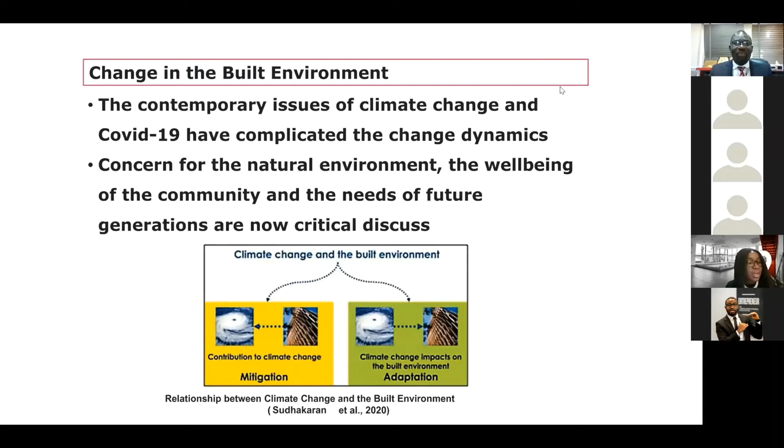And in the built environment, the contemporary issues of climate change and COVID-19 have actually complicated the change dynamics as we have it. And climate change and COVID-19 cannot be treated in isolation. That's why I've developed in this study a STEEP analysis, STEEP being an acronym: S for social, T for technology, E for environment, E for economy, and P for politics and legal. But our focus here is on the environment, using this to analyze the Nigerian built environment.

Because as we prepare for the future, nobody can know for certain what the future will be, but we can at least envisage it in order to be prepared for it, because the future belongs to those who prepare for it today. So the focus of this lecture is on the environment and how architectural education can respond to the change dynamics of the environment, although environmental issues essentially cannot be treated in isolation. So in preparing for change, there is a need for us to peer into the future.

Some studies have shown that the inevitable rural-urban migration is due to climate change. But most studies have confirmed that rural-urban migration is chiefly for economic reasons rather than climate change. And this is important and instructive. That's why people from depressed economies and unstable, repressive governments will rather seek a better standard of living and job opportunities in urban centers and thriving countries.

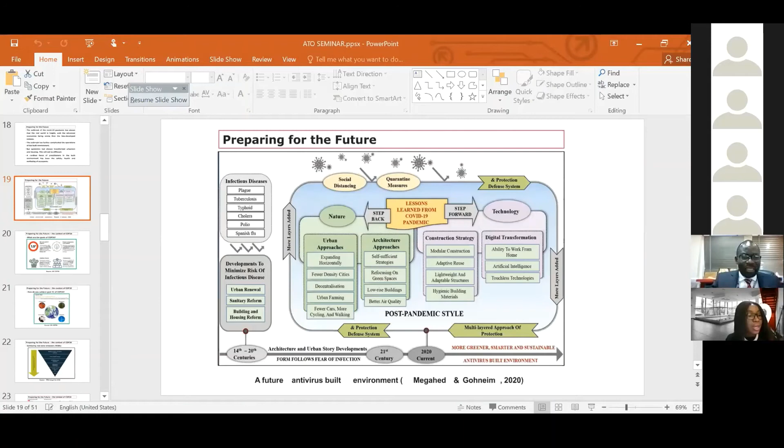So, okay, I will reshare it, but I will just quickly explain for the sake of time that we step back into nature, and we step forward into technology. As we step back into nature, we look at urban approaches in addressing this problem in terms of expanding horizontally, fewer density cities, decentralization, urban farming, fewer cars, more cycling and walking,

and architectural approaches in self-sufficient strategies, refocusing on green spaces, low-rise buildings, better air quality, and step forward into technology, as Azan had rightly presented it, in modular construction, lean construction, adaptive reuse, lightweight and adaptable structures, hygienic building materials, ability to work from home, that's digital transformation, artificial intelligence, and touchless technologies, where robots and humans can easily interact. That is stepping into the future, that's technology.

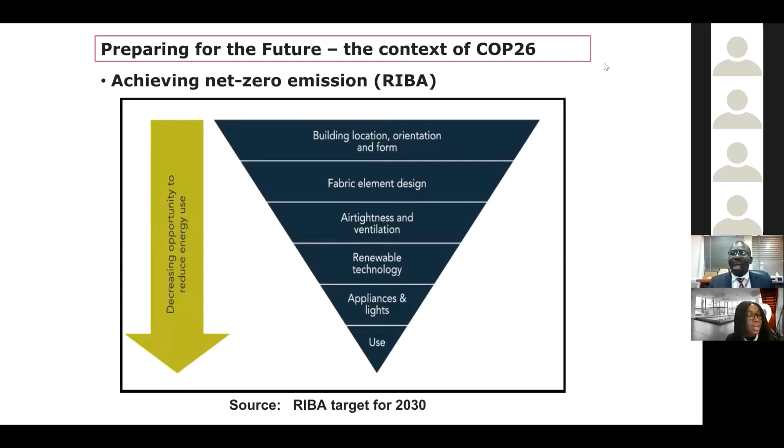And in achieving these net zero emissions, training also has to be in terms of the design of buildings, location, orientation, and form, which occupies the large band in this graph, and the lowest one has to do with use. So you can see from this chart that rather than relying more on appliances and gadgets, it all begins by getting the design right in terms of location, orientation, form, and fabric elements. It is through this we can essentially reduce energy use in buildings, just the same as in achieving the 17 sustainable goals, out of which 10 relate directly to the focus of our discussion today.

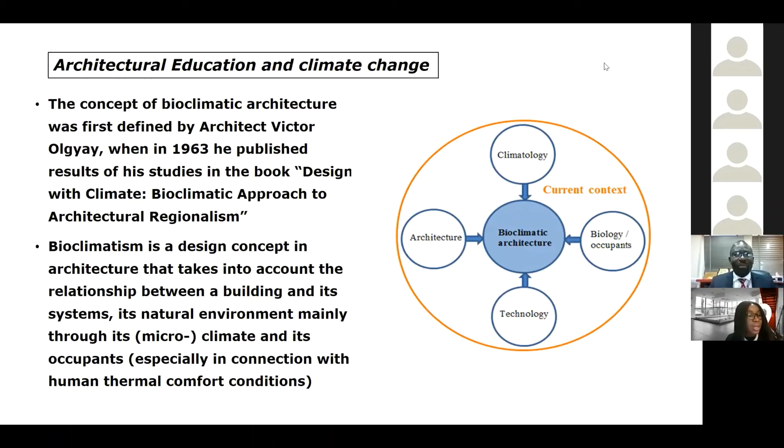So the future of architectural education is quite interesting. We know it's not static. Environment is not static. Nature is dynamic. Therefore, architectural education is expected also to be dynamic. If we take a lesson from the bioclimatic design of Victor Olgyay in designing buildings with climate, we find that even in this current nature, or beyond bioclimatism, the origin of the bioclimatic approach itself can be traced to vernacular and traditional buildings. That's why I am advocating for the combination of nature and technology in solving this problem, in training, and in looking into the future.

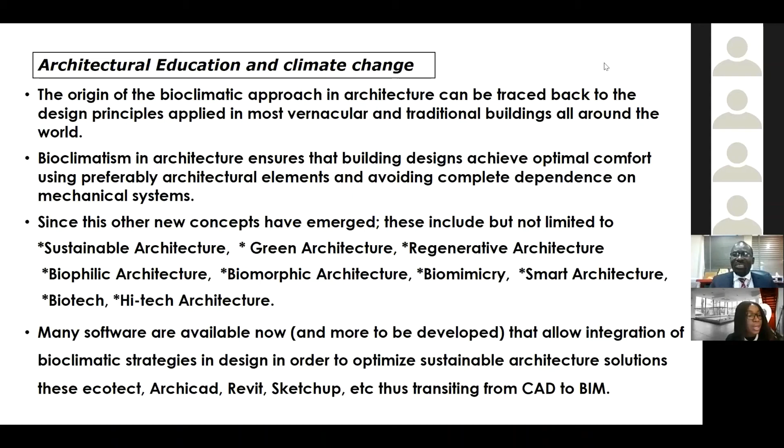And the same thing we have today as sustainable architecture, green architecture, regenerative architecture, biophilic architecture, biomorphic architecture, biomimicry, smart architecture, biotech, and high-tech architecture can all be put into one box as relating nature with technology. And again, we have different software that has been developed, Ecotect, ArchiCAD, Revit, SketchUp, all transiting from CAD to BIM, and that's what we have.

So, ladies and gentlemen, in conclusion, I would like to conclude quickly by attempting to answer 5 pertinent questions and also quickly present to you a project which we have just concluded that peeps into the future. The first question is how students are prepared for the unpredictable future and the challenge of climate change. And I will simply answer by saying, yes, our students are being prepared, by virtue of what is currently in the modules, in the courses and in the teaching, emphasis being placed on occupant safety, health and comfort, on architectural science, on sustainability.

The second question is, what are the extant modules in preparing these students for climate change? In all those 8 modules that I've enumerated, it means that from time to time we look at the contents of the courses and improve on them, also applying further innovation and findings from research and technology in improving the course delivery, the curriculum, and the way and manner these courses are being taught.

The third question has to do with the degrees, whether there will be any change or not. I believe very sincerely that the 2-tier degree structure for training architects will still be the best option. However, as I've said, curriculum is being changed from time to time, and there are higher and professional degrees in MArch, in PhD architecture, which I would rather prefer, that architects only will have PhD in architecture, but others will have PhD landscape architecture, PhD in architectural studies, as we have in reputable institutions abroad.

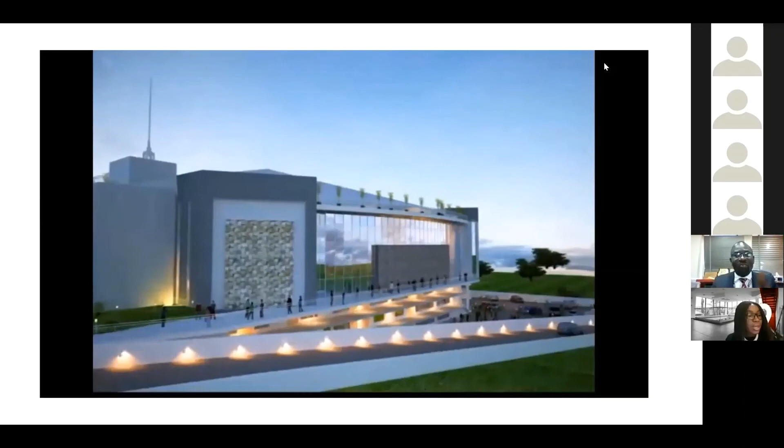Give me some few minutes in answering this question, because that will help us with the design portfolio and the project that we have just concluded that I'll quickly show us now, which is the Citadel project. And we'll see that this is an animation. This was done about 5-6 years ago in terms of the design, about 6 years ago, but it's currently standing now. And we'll see the animation compared to the live building as the building is standing.

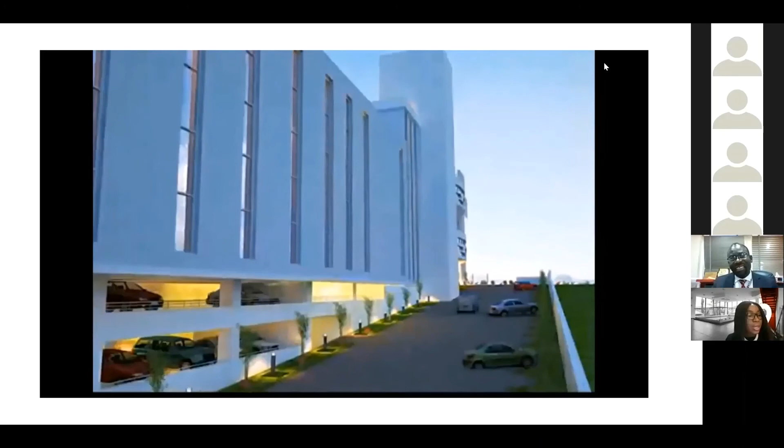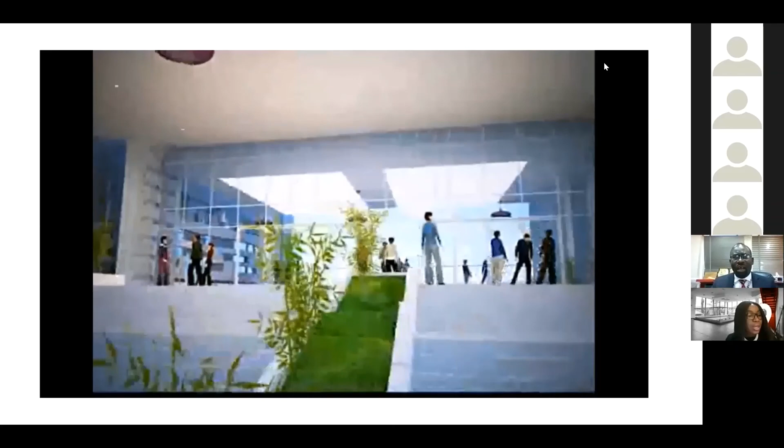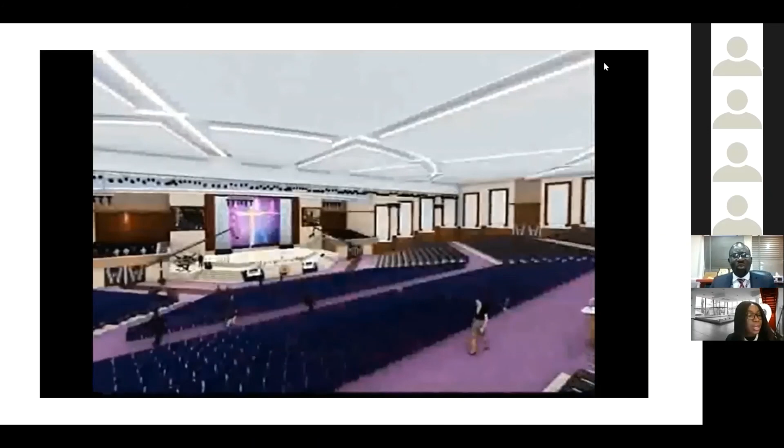But what is interesting here is in the design, the flexibility, the adaptability, the sustainability, and the approach to the design, a church design. Essentially, the worship center, the auditorium, over 5,000 seated capacity. But beyond that, there are other facilities like classrooms that are used on Sundays for Sunday school teaching. But between Monday and Friday is a full-fledged school going on there. That's the kind of adaptability that we're talking about.

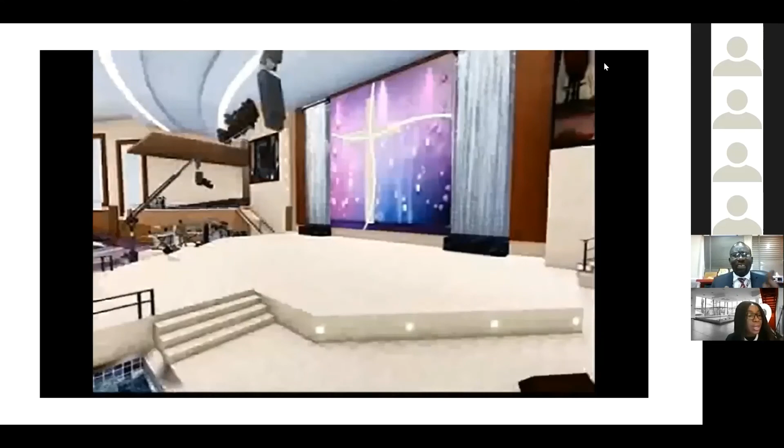This facility functions 24/7, not just on service day, 7 days a week, because of all facilities in terms of training, you could also find that youth center, youth connect center, health facilities in terms of the swimming pool, the gym, the sauna, as we will see right in this animation.

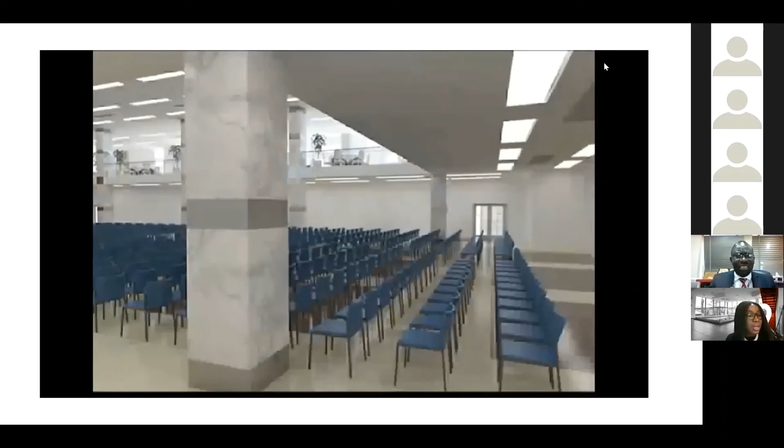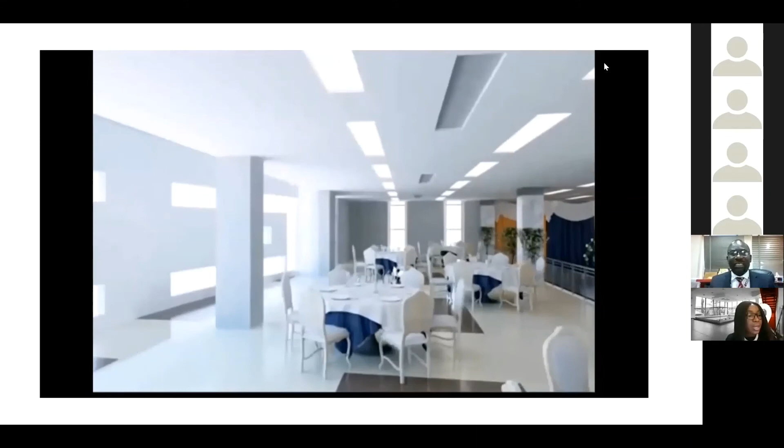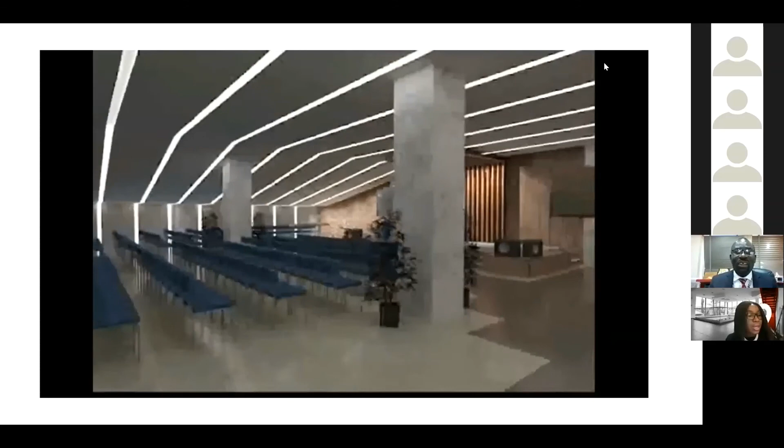So essentially, we're saying that as we look into the future, even in analyzing the client's brief, analyzing and synthesizing to come up with a design, we have to prepare for the future in terms of adaptability, in terms of flexibility, and in reducing carbon emissions in all what we're doing, and engaging in software and in technology in being able to solve the problems of the future. And students have to be engaged in this all through in terms of training. And that is why even the students are involved in this practice.

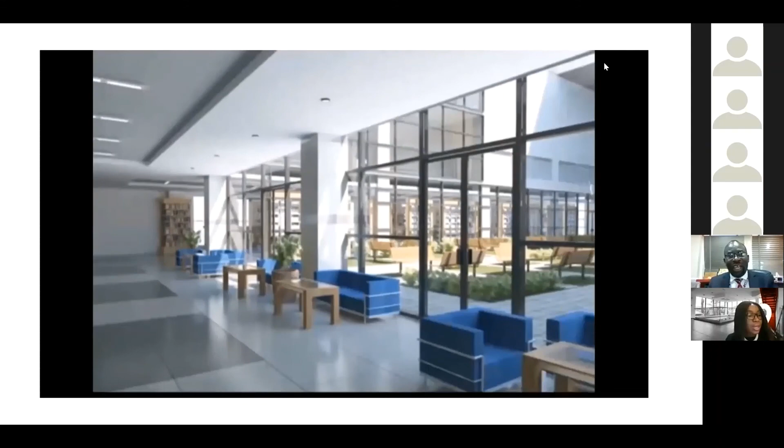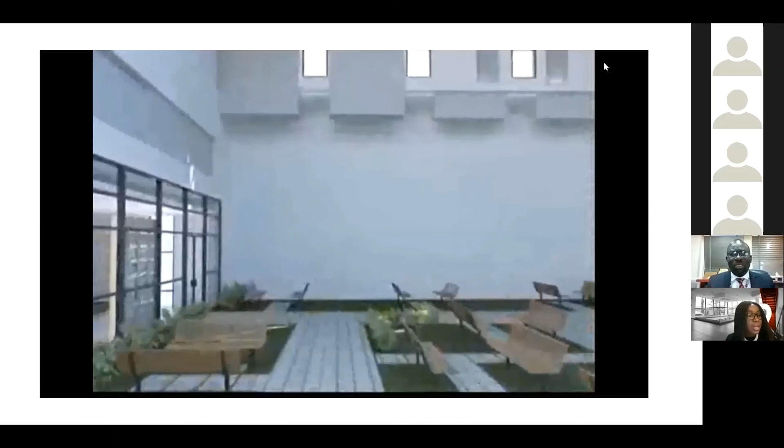What we are seeing right now is an atrium within that same facility where you have a greenhouse effect. And this is showing part of it in terms of the library, the bookshops, and facilities that can be used by the community. Because I believe essentially that our buildings must be energy efficient, community inclusive, socially relevant, and ecologically balanced. And in putting this together is how we can address all these for the future.

So going forward, in closing, I would like to say, we could see that even before the pandemic came, this design had been done. Now we are faced with the pandemic. We don't know what else will happen again. But as architects we ought to be trained in a way that we will not panic. This will not come as a surprise, because essentially design has been done in order to take care of these future eventualities.